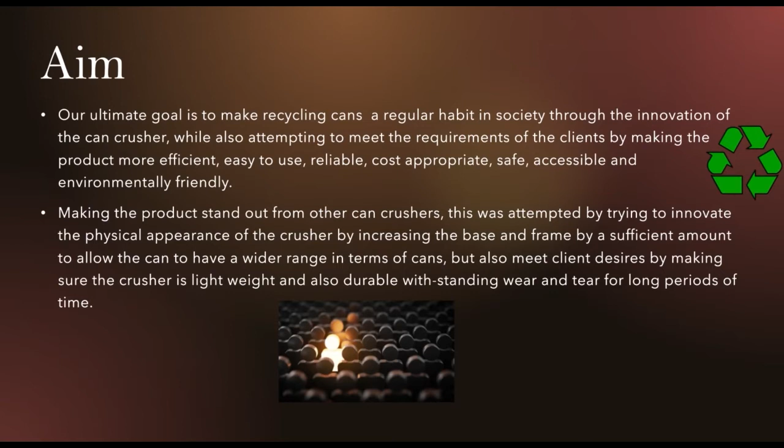In terms of simplicity and accessibility, we thought about making this possible by placing the crusher in a more public area, open to the community or anyone who wanted to use it. When it came to design, application, and consumer usage, we did not want to overcomplicate the product. We tried to keep it as simple as possible, as we wanted it to be less costly to manufacture.

In terms of application, we wanted the crusher to simply crush cans effectively, swiftly, and with less effort. By making it user friendly, our aim was to make the crusher require less work to crush the cans. This is attempted by trying to innovate the design of the crusher to work more efficiently, also making it easier to use.

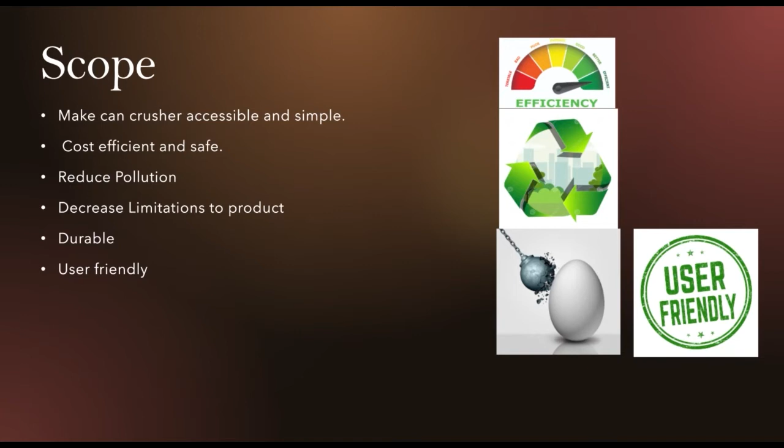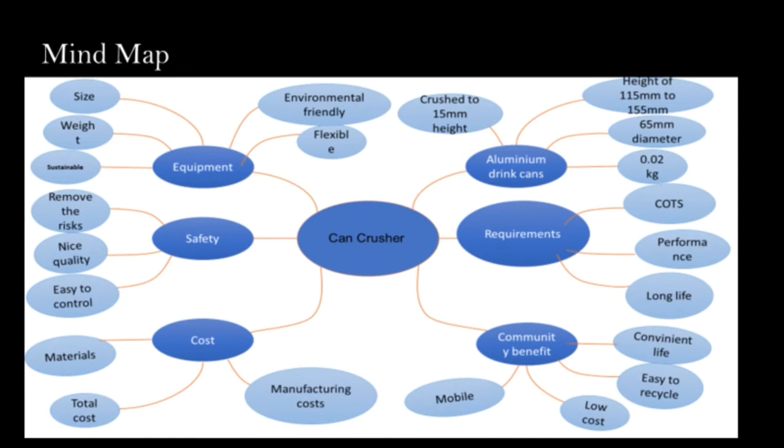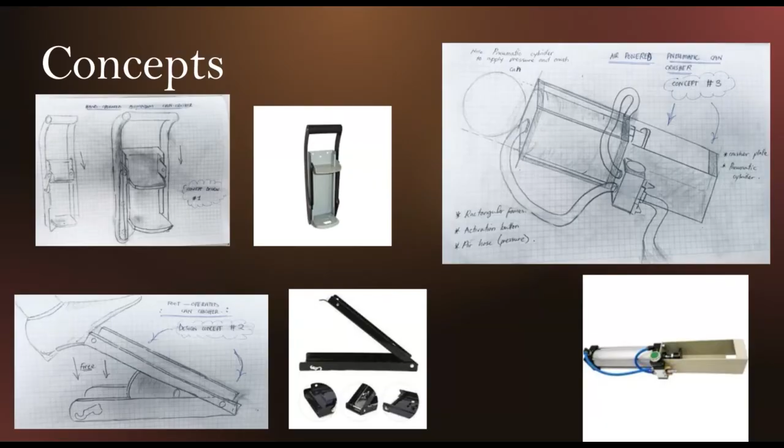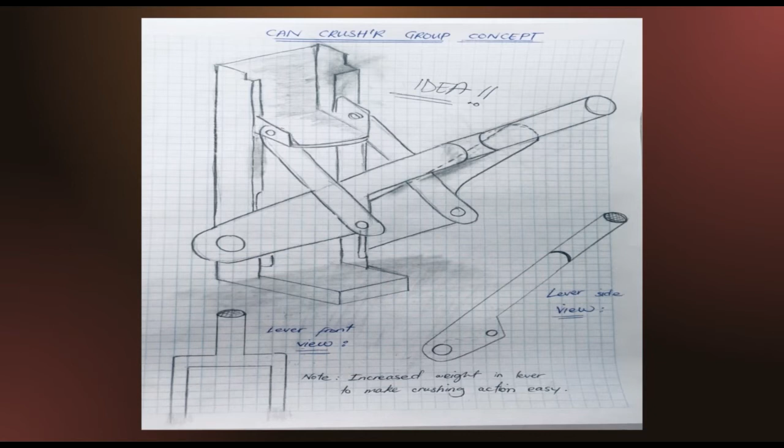This is an idea of how we chose to innovate our crusher. The main idea was to make the lever and the crushing mechanism one, connecting the pulley and the main levers where the force is initiated, changing the pulley from a horizontal direction to a vertical direction, which made more sense for pulling the crusher down. We were thinking of increasing the weight of the levers to make the crush smoother and easier, and if not in use, it would just hang there.

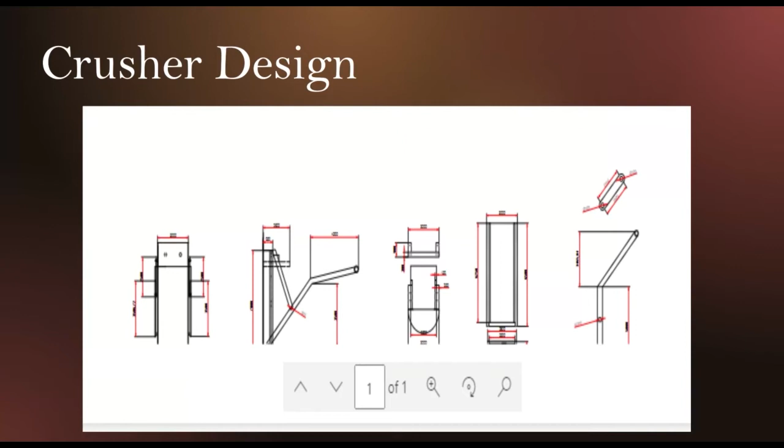Next, these are our digital 2D designs, the drawings that we made. This is the front base view and the side views.

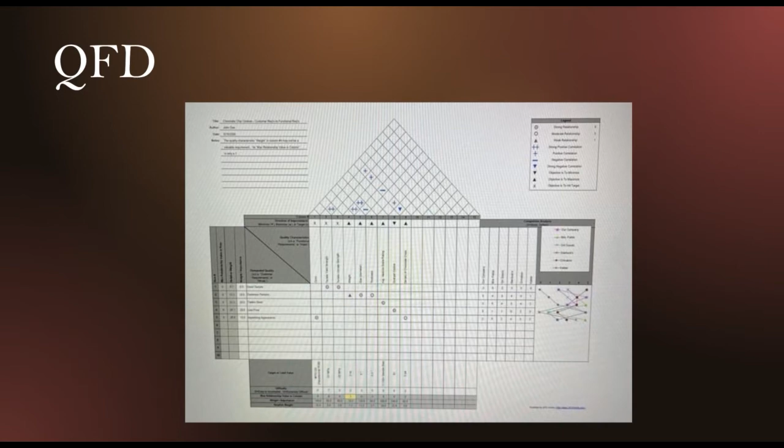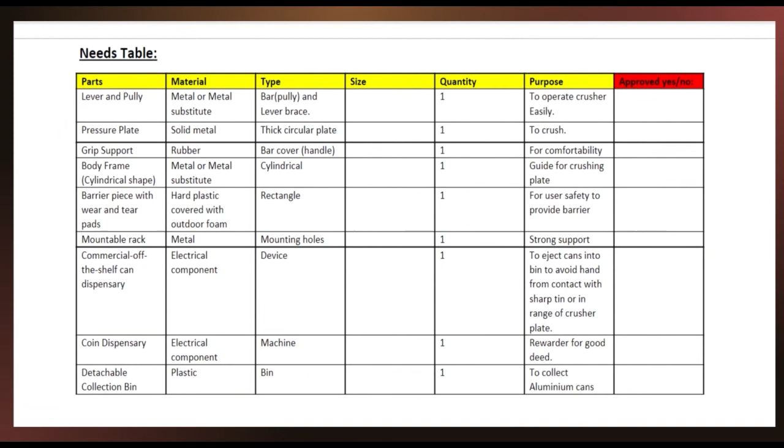We all know the purpose of the project isn't just to design a product. We also learn how to manage our team. Team management is a very important skill, not just for applying for a job, but also for going to work. It is a future aspect.

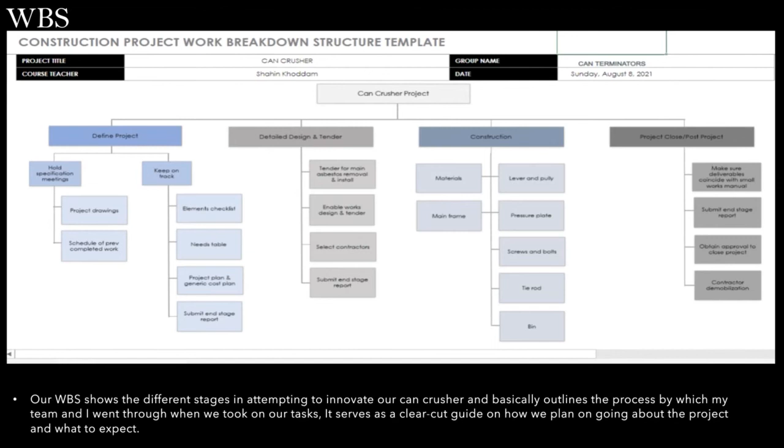It is important to create a WBS, also known as the work breakdown structure. It doesn't just show the different stages of our project to innovate our can crusher so that it can stand out from other can crushers, it's also a guide on how we're going to plan our project. We listed all of the stages, as you can see in the WBS.

And the last things are the meeting minutes to show our records of the meetings. There are a total of 10 meetings, so yes, there are 10 minutes.

So one more thing are the videos. I want to show you the very interesting video that we created using SolidWorks, one of the lessons we got from our course. Please, Wilson, show us the videos.

Yes, I did. You want me to play again? I cannot see anything, there's only blanks. Can you play the video? Just here now? Just play the videos on the web, because you're showing your screen. Yep. Yes, please, thank you.

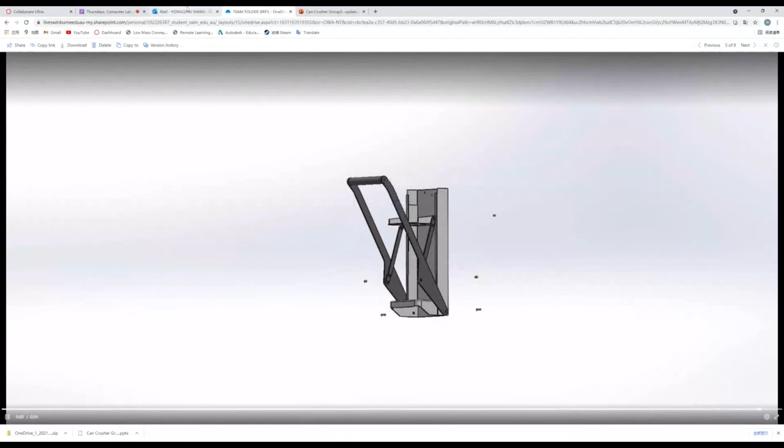Yes, this is the assembly video. As you can see, there are not many parts and it's easy to assemble. So our product is absolutely easy to assemble, easy to use.

And the next video shows you how the product works. You just simply pull the handles and the can will be crushed under the pressure of the pressure plate. And yep, that's all, thank you for listening.

Okay, thanks very much, the team. That was a very interesting work and I really enjoyed it. Please give a round of applause to the presentation. Thank you, thank you. All right, good, good. It seems everyone enjoyed your presentation as much as I did.